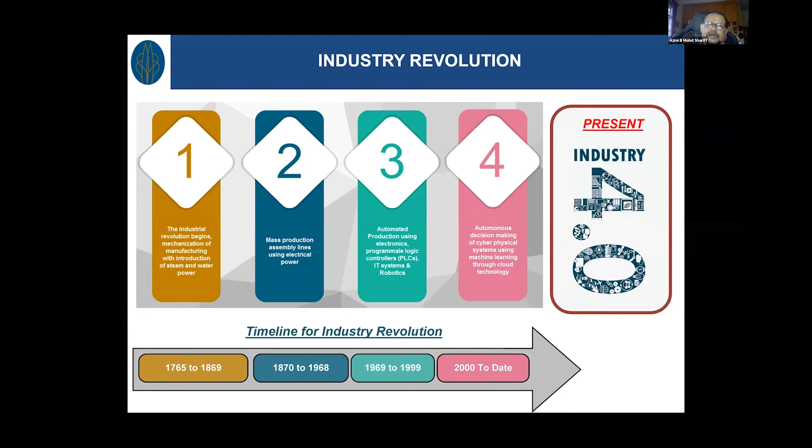Currently, in this decade, we are at the Industrial Revolution 4.0, focusing more on autonomous decision making of cyber physical systems using machine learning through cloud technology. This is really a breakthrough that allows people to work autonomously, like what we are doing here - I'm in Malaysia, you are anywhere in the world, and this allows us to communicate through this kind of conference. So the question is how process safety should take advantage of this current technology available in order to control the issue of industrial accidents.

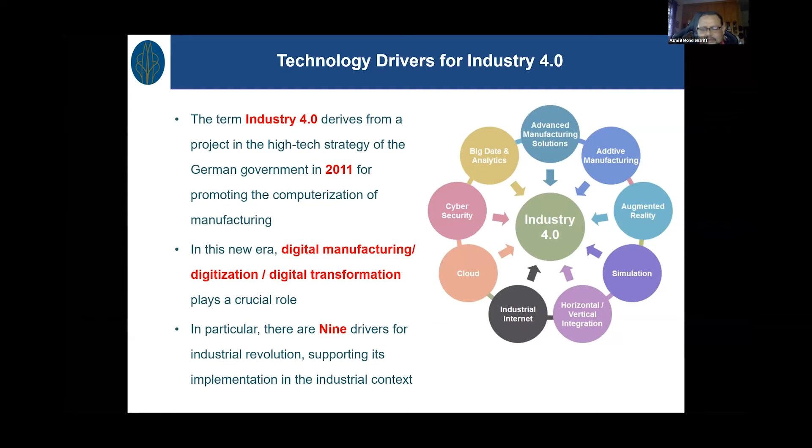So what actually are the drivers of this Industry 4.0? Basically, the term Industry 4 is derived from the German high-tech strategy from the German government in 2011, for promoting the computerization of manufacturing in this new era - digital manufacturing, digitization - where digital plays a crucial role. We have basically identified 9 drivers that make this technology successful in this Industrial Revolution 4.0. So what are those 9?

Basically, these are advanced manufacturing solutions, meaning autonomous cooperation, industrial robots, and so on. Additive manufacturing allows for 3D printing. Augmented reality allows us to turn real cases into digital information and simulation work. Horizontal and vertical integration allows data integration and data transfer in an easier way. Industrial internet connects networks, machines and products. We have cloud technology to manage the huge data that we previously were not able to handle. Cyber security ensures data can be managed securely at this level. And more importantly, big data analytics allows full evaluation of data. So by having all these 9 drivers together for Industry 4.0, this allows us to move forward to ensure better safety in the process plant.

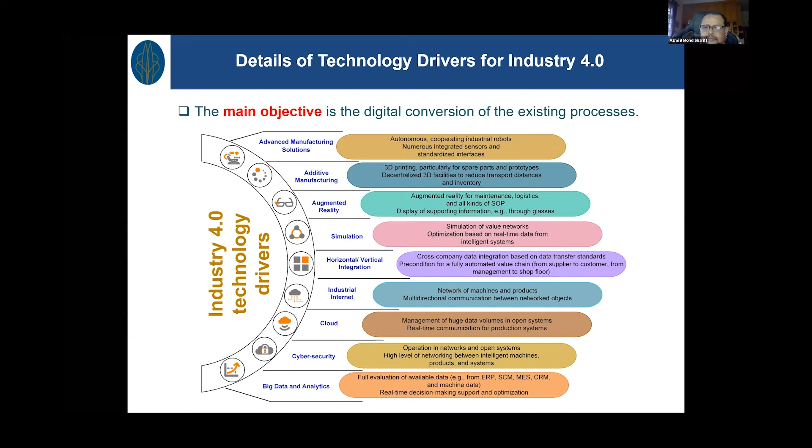In order to be able to utilize this kind of technology, we have to understand two terms used in this Revolution 4: what is meant by digitization and what is meant by digitalization. So what is digitalization? Digitalization is the use of digital technology to improve the business or the tool itself. This is a fundamental requirement in order to allow our business or processes to function.

For example, we used to have a brick and mortar business, like a big supermarket, that currently we can change to an e-commerce platform like eBay, through digitalization. We'll still be able to get the product through this kind of technology.

Digitization is the transformation of existing non-digital information or processes into digital ones. That means we have to translate and transform whatever information or data into a digital platform. For example, using a cloud-based accounting system to replace a paper filing system in a bank. Another example is using email instead of typewriters, moving to Google Docs. So these are the differences in the meaning of digitization and digitalization.

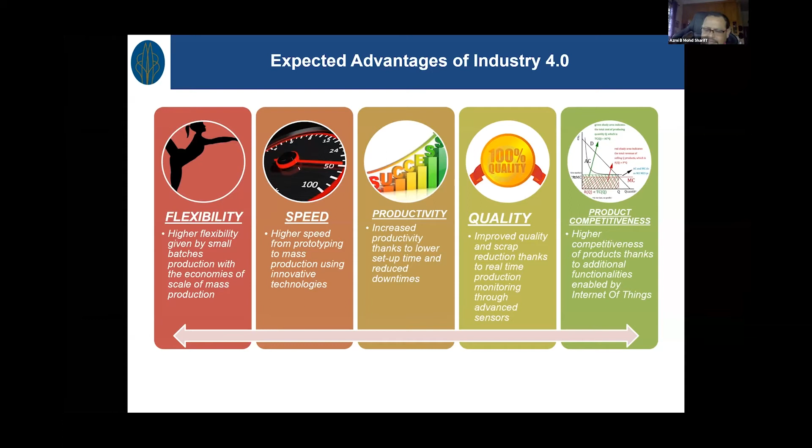So we understand about the revolution, we understand about the technology and how to relate it with process safety. And we understand that in process safety, we have many accidents happening worldwide, previously and even now. Recently, there was an accident in Indonesia just a few days ago that involved a refinery plant.

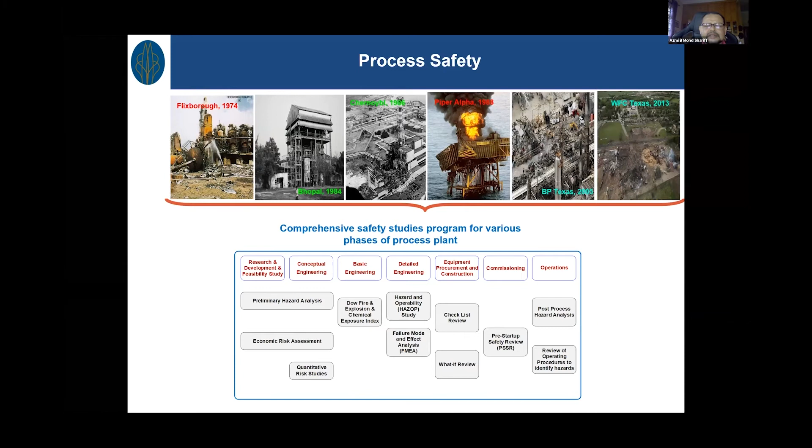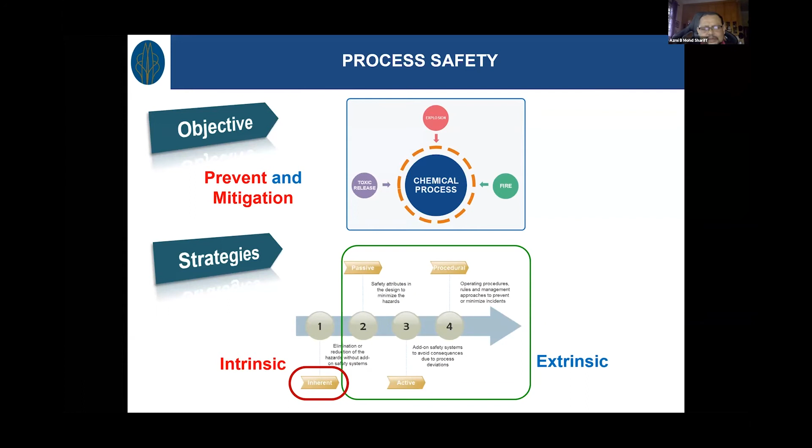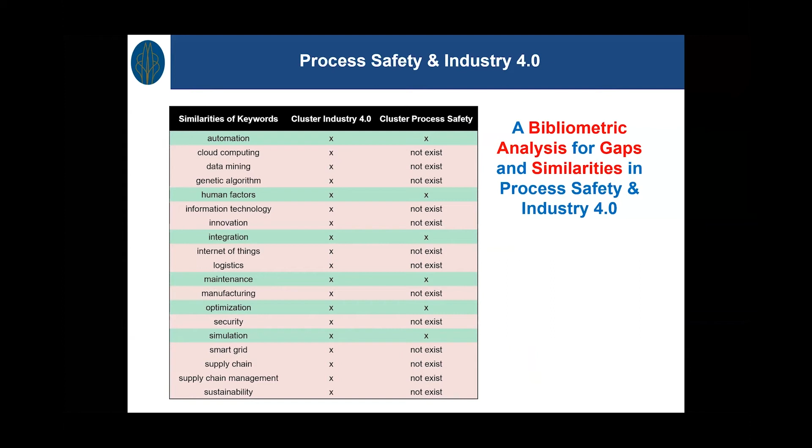So how can we take advantage of the Industry 4.0 revolution from the perspective of process safety? In order to do that, we try to understand the similarity between process safety and the Industry 4.0 cluster. For Industry 4.0, on my left-hand side, you can see that I listed the keywords normally used in information and communication technologies, like automation, cloud computing, data mining, genetic algorithms, human factors, IT, and so on. There is a whole list there.

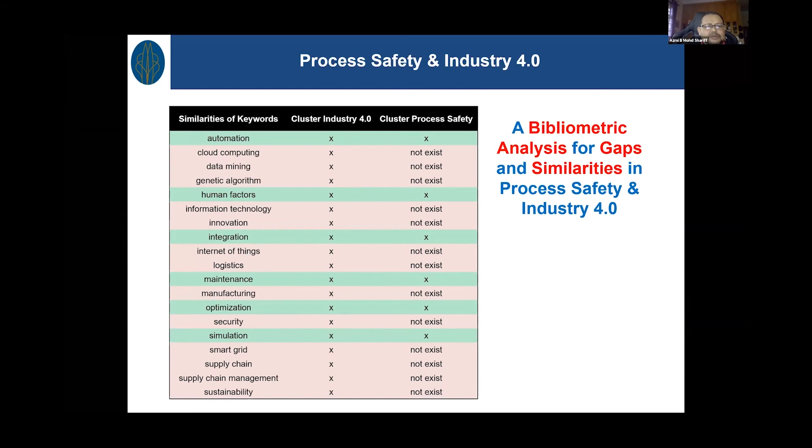And basically, when we align it with process safety, only a few really align with the requirements of the process, like automation, human factors, integration, maintenance, optimization, and simulation. So at least there are a few keywords that are directly related, and there are a few other keywords that we want to take advantage of from the Industry 4.0 cluster.

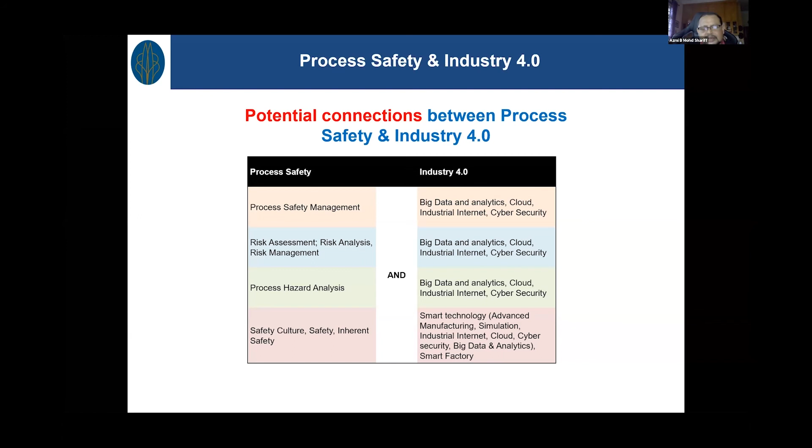So we can use big data and analytics in our process safety processes, cloud, industrial internet, cyber security, and so on. So that is the potential, and the only thing is how to do it. So let's look at the example here on process safety management. Everybody understands that under process safety management, there are pillars of PSM.

Under the process safety management, we know about our commitment to process safety, understanding hazard, how to control hazard, managing risk, and learning from experience. And from this, if you look, selected few elements in risk-based process safety.

We look at the commitment, we are talking about process safety information and employee participation. Understanding hazard, looking at the process safety information as well, together with the process hazard analysis, and how to manage risk. We are looking at the operating procedures, hot work permit, mechanical integrity, contractors, training, management of change, and so on. And learning from experience is through incident investigation and compliance audit.

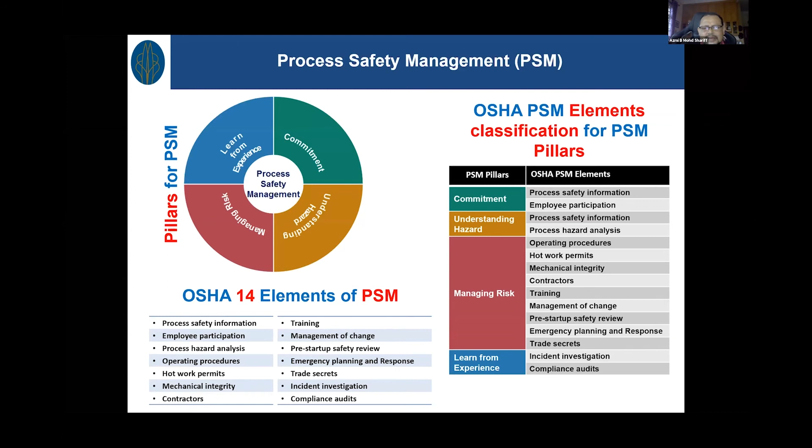So these are the elements that we normally refer to, which are also available in OSHA for the elements of PSM. So there is a link between the two. So we understand this process safety management, and how we can link it into Industry 4.0 to take advantage of Industry 4.0, through information and communication technology. So the one that we want to look at is the information on process safety

management. The first part is we want to digitize the information so that we can transfer it to the digital tool. So in order to do that, understanding of PSM is very important, starting with understanding the set of guidelines and regulations available in PSM. There are many issues contributing to the effective implementation of PSM, like human error, that we have to be aware of. In this context, the digitization of PSM can be more effective to overcome the shortcomings.

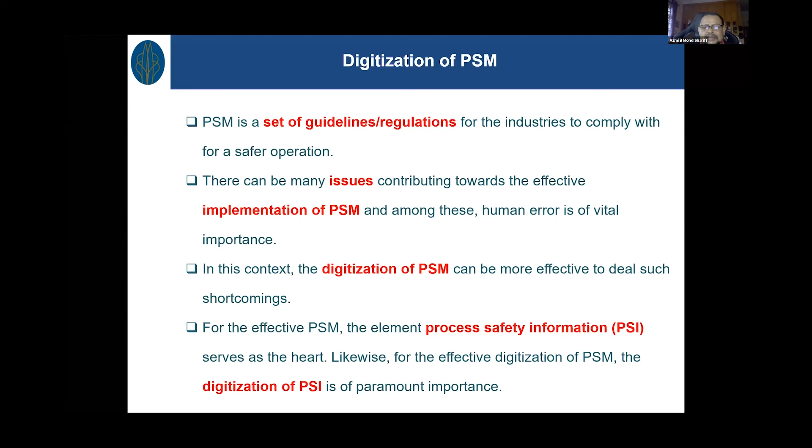For effective PSM, the process safety information element should be the heart of it all, so for effective digitization of PSM, digitization of PSI is of paramount importance. So if we go into detail about PSI, what to digitize? Basically the OSHA requirement already details the requirements. So we should thank those who contributed to identifying this kind of information, so we can directly look at the requirements in detail, and then we need that information to be in.

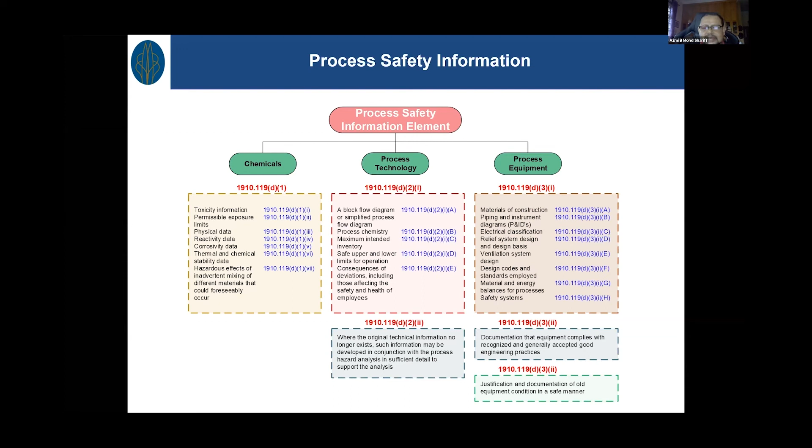And of course, each industry also has its own unique data that can be added on within these three important process safety information elements: chemical, process technology, and process equipment. As an example, for chemicals, the required data based on OSHA includes toxicity information, permissible exposure limit, physical data, reactivity data, corrosivity data. So there's a long list there, but we can also have unique data as an add-on to this chemical requirement. Similarly for process technology and process equipment too. I need to skip because time is not on my side now.

All right. So in order to better digitize the information, we need to go into a little more detail to translate that into the actual information according to the flowchart. If you look at the flowchart, we have to develop the PSI system first. Or if you already have the PSI, how are we able to organize it properly? OSHA basically provides the information, and the risk-based information from CCPS is also available. So in order to develop the PSI, there are codes and standards provided.

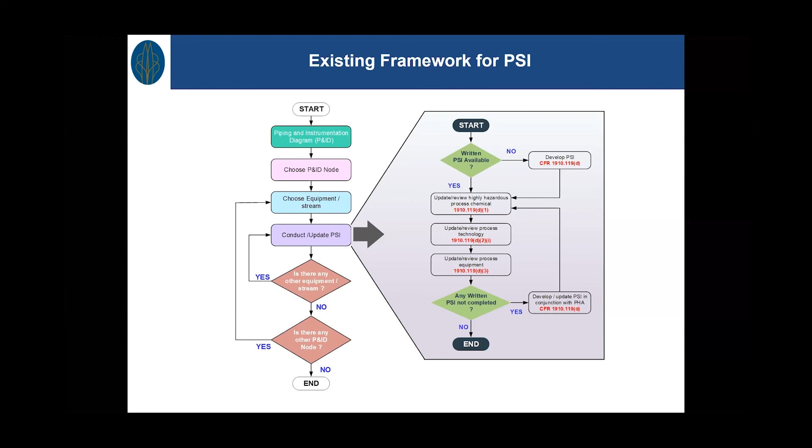So first we develop the PSI, and if it is already available, then we can update and review our hazardous chemical processes. And then we can also review the process technology and the process equipment. So three areas are covered in the process safety information: chemical, process technology, and process equipment. And then if everything is complete, how do we put it into perspective? To put it into perspective, it's easier.

For example, if you look at our plant, like a P&ID, when you want to include the information, you follow the P&ID where you start from the feed until your product. So if you use the P&ID as your platform, then you can choose the P&ID node. And from the node, you can choose the equipment and stream. And within this, we look at what data is required based on the chemical, process technology, and process equipment. And then we can conduct and update the PSI accordingly.

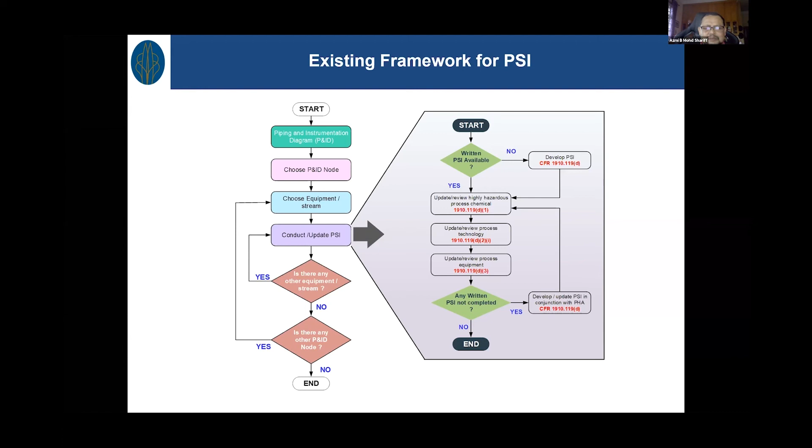So it should be very straightforward and simple because we have guidance through this kind of standard, but understanding is very, very important. So how do we translate this into a digitization opportunity? We need to look at which ones we can digitize, and which ones we don't really need to digitize.

In this part, if you look at the process, if we start using the P&ID, there is a manual part where we have to decide where to start, where to end, how to divide the node, and so on. But the simple way is if we follow the HAZOP technique, a HAZOP node, that should be sufficient in order to develop this PSI.

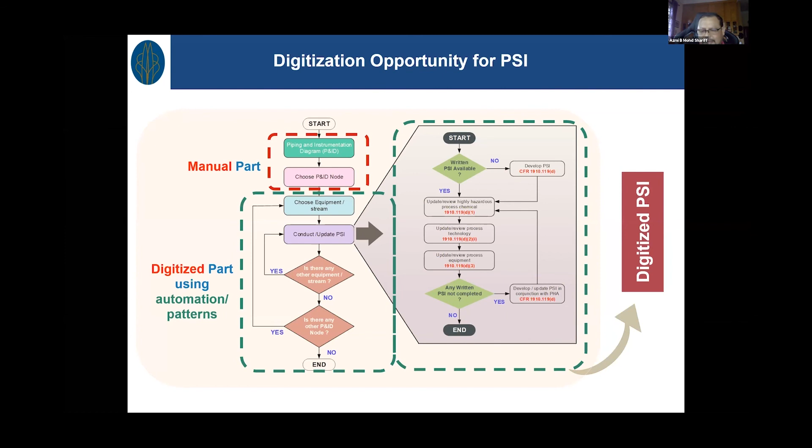And from there, basically, we can digitize the information based on the flowchart shown here as an example. Okay. And then from this part, I mentioned how we digitize, and from this digitization, we can transform the digital information into the tool. And we can do this also for the others like PHA, operating procedure, hot work permit, mechanical integrity, and so on.

So this will give the benefit to us through quick automatic studies or surveys, updating the changes automatically, quick response to the changes, to get the information. That means information is available at all times, without the need to go through the filing system. If we have Excel filing also, we still need time. So how can we digitize that to be more efficient with our data?

So this can allow us to do quick and live assessment, because we are talking about automation. And using that, we can avoid human errors, especially in data filing and data sourcing, to find the data, and that can avoid accidents due to the unavailability of data within the system.

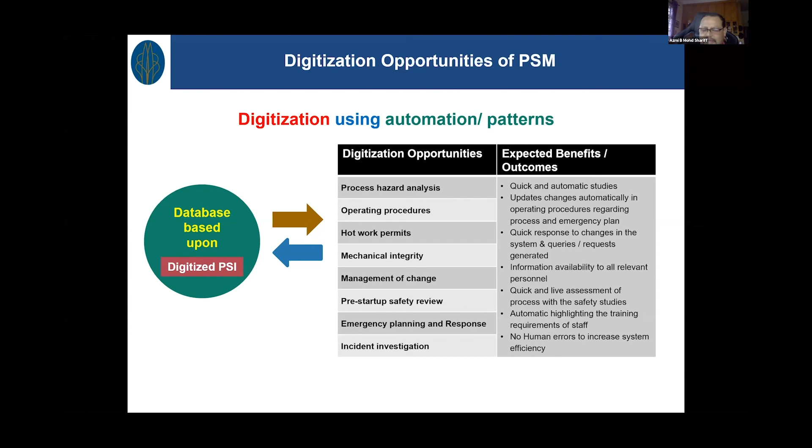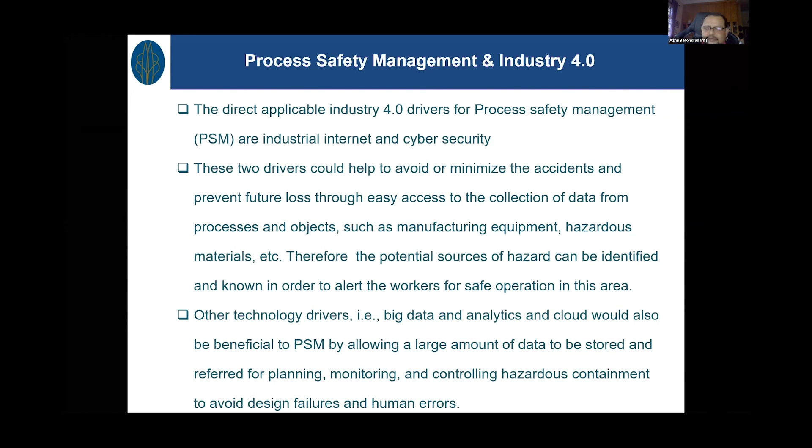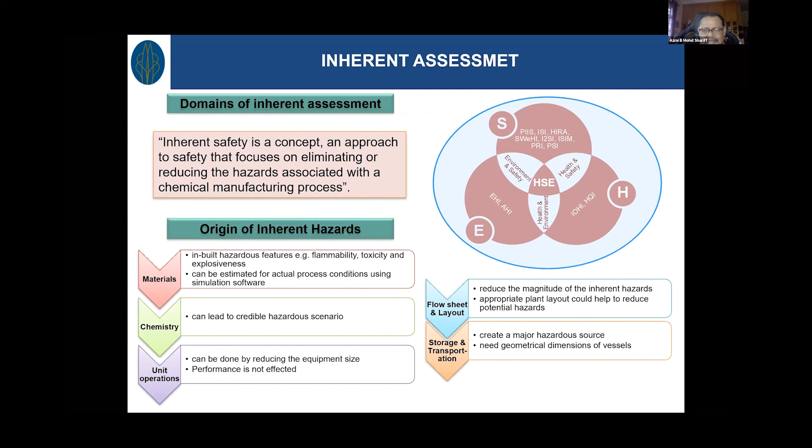Okay, I have another example. I think I want to skip this example because I have only 25 minutes for the presentation. Okay, I will go directly to the general impact of Industry 4.0 for process safety. Sorry that I have to skip the example on inherent safety.

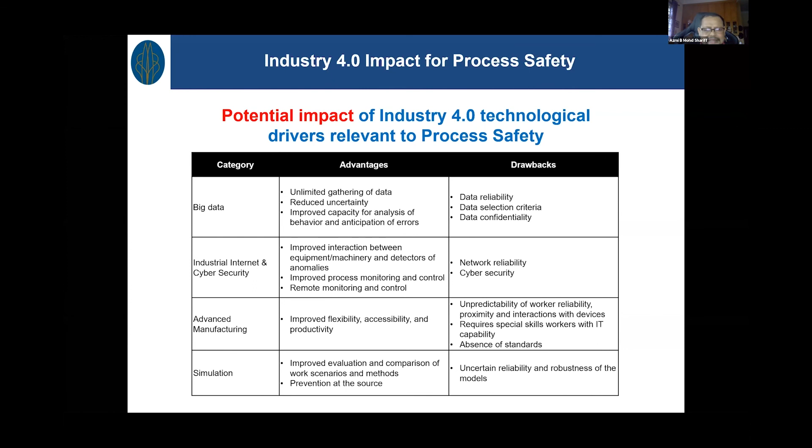Because the chairman only provided me 25 minutes for my presentation, I would like to conclude. The future opportunity of Industry 4.0 in process safety: process safety in the Industry 4.0 era requires industrial standards and guidelines to ensure safe operation of process plants, with the fear of cybersecurity issues. Along with data analytics, smart handling of this data is necessary to take full advantage of this opportunity. The design, fabrication, and operation of process plants need to be upgraded in the context of Industry 4.0.

We are talking about autonomous operation. We have to go for it. Do not be afraid. So we have to look at this for inherently safer and sustainable process plants to avoid recurrence of accidents. And finally, future workers require human-machine interface skills and capability. Sorry that I went at that speed in order to complete my presentation.